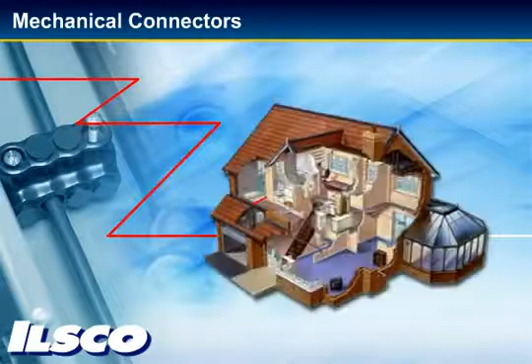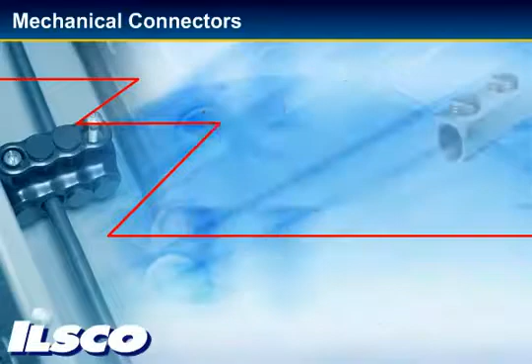Trace a wire run through any residential, commercial, or industrial job site, and you will discover one of the most critical electrical components in the business, the humble connector. Wherever you find wire, you'll find electrical connectors. And as far as power connections go, the mechanical connector is one of the most efficient methods of splicing, terminating, or tapping electrical wire.

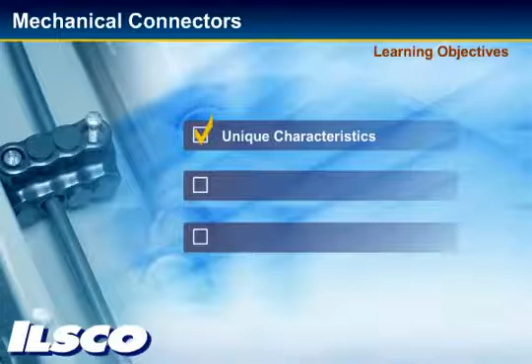In this module, we will define the three primary functions of connectors. You will learn the unique characteristics of mechanical connectors and how they differ from other connector types. We will review the standards that apply to mechanical connectors, and will demonstrate important steps for the proper installation of these connectors.

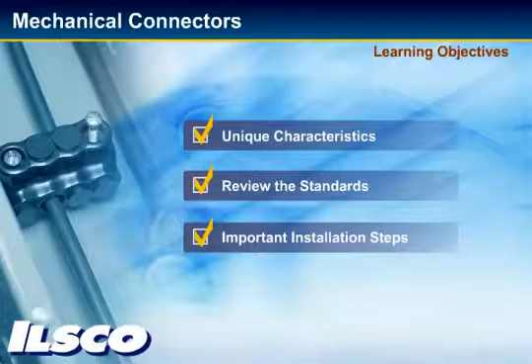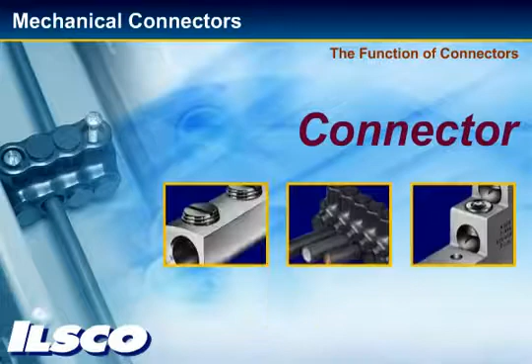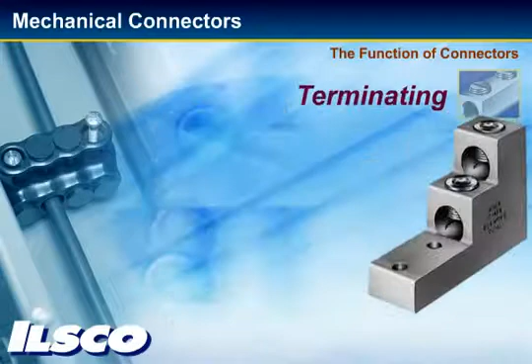The term connector is used to describe all devices used to connect electrical conductors. Connectors serve three primary functions: splicing or joining two similar or dissimilar cable ends together, terminating or preparing a wire or conductor for use with some electrical component or device, and tapping or transferring power from one circuit to form an additional circuit.

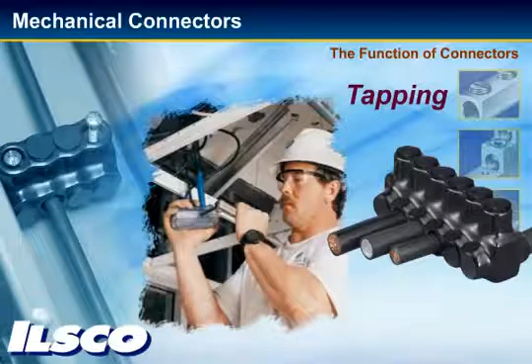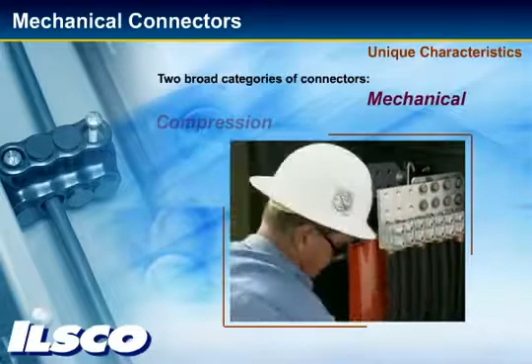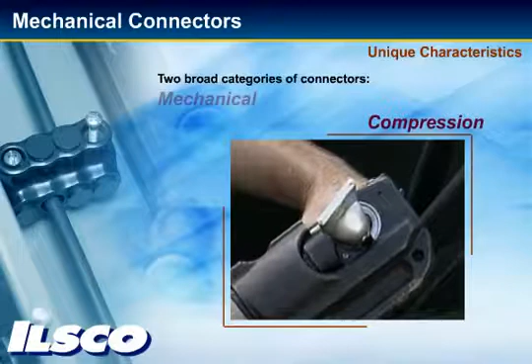There are two broad categories of connectors, mechanical and compression. Mechanical connectors are pressure-type connectors that use the pressure or torque applied to one or more tightening members to force the conductors into a reliable connection. Compression connectors use a high force, normally generated by a tool, to squeeze the connector onto the conductor.

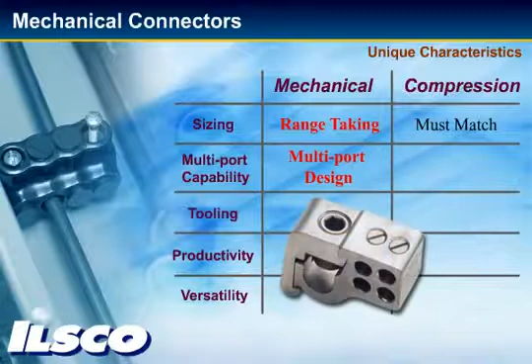Here's how the two types compare. Compression connectors often must closely match the cable size they're used on. Mechanical connectors can accommodate a wider range of conductor sizes, helping to reduce the number of connectors that must be inventoried. This feature is referred to as range taking. The multi-port design of some mechanical connectors allows a single connector to terminate many different size cables, while a different compression connector would be required for each individual cable size.

Mechanical connectors require no dies to inventory, so less hardware is required. Compression connectors require specific tools and dies, which must be available on the job site.

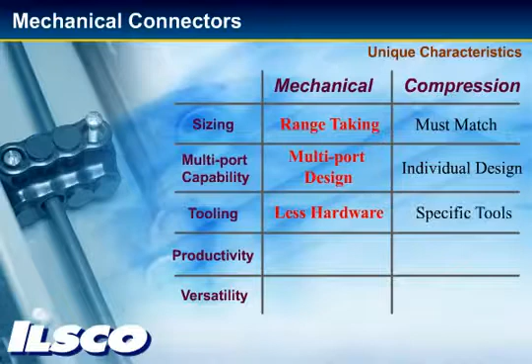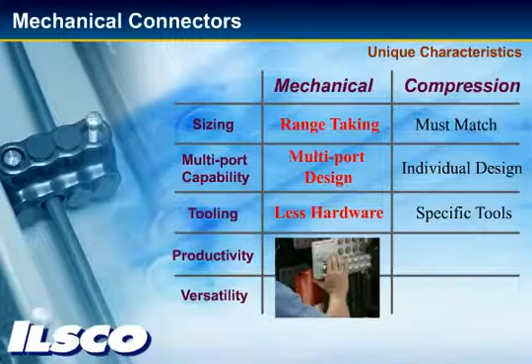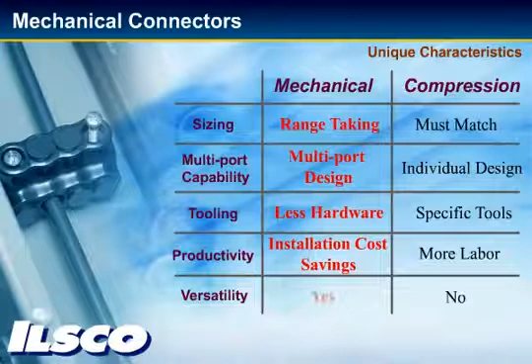Installing mechanical connectors is less labor-intensive than compression. There are fewer parts, which equates to less time on the job, resulting in installation cost savings, an important consideration for contractors. Unlike compression connectors, mechanical connectors are reversible and reusable.

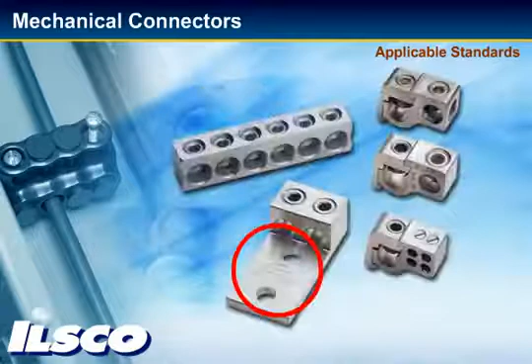ILSCO tests their connectors to ensure they perform to applicable UL, ANSI, and CSA standards. One of the most important considerations is that copper connectors should only be used with copper conductors. Aluminum connectors can generally be used with both aluminum or copper conductors. The marking on the connector will show if the connector is dual rated for use with either aluminum or copper conductors. This will be a mark of AL9CU or AL7CU. The marking on the connector should always be considered before use.

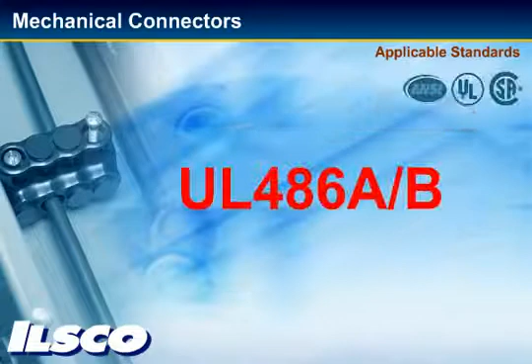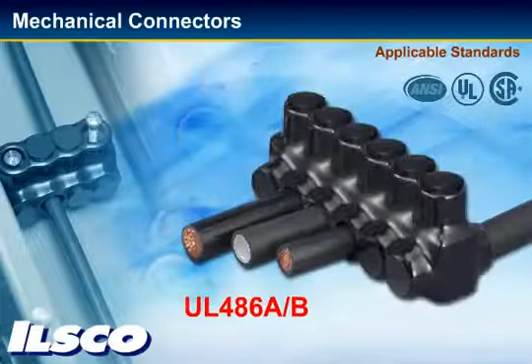Let's review a few of these common standards applicable to mechanical connectors. The UL 486A/B power standard applies to connectors used with copper or aluminum conductors. It is intended to ensure that connectors will make a reliable connection when used with certain size solid and stranded conductors specified in the standard.

All standard connectors are tested at 90 or 75 degrees centigrade. Copper connectors are assumed to meet the 90-degree test standard and are not required to be marked as such. UL requires that aluminum connectors carry a temperature rating mark. Connectors may carry one of the following rating marks.

These ANSI standards, ANSI is the American National Standards Institute, are similar to UL 486A/B standards, but are applicable to the utility industry. Be aware that there are other standards that apply to various types of connectors. For more information on these, we provided links to detailed UL information.

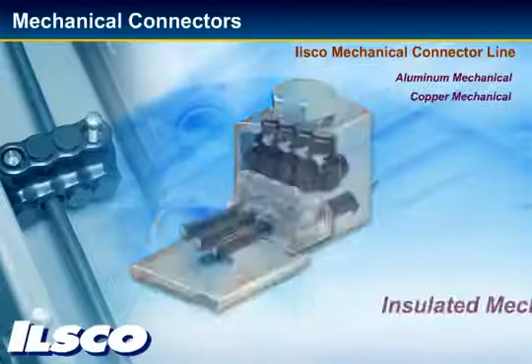The ILSCO mechanical connector line includes these product families: aluminum mechanical, copper mechanical, insulated mechanical, insulation piercing connectors, tap connectors, splicers reducers, and aluminum neutral ground bars.

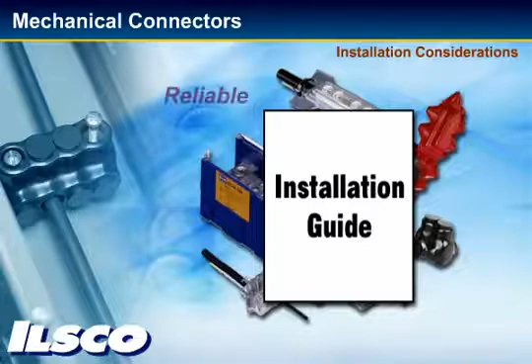As with all electrical components, following recommended installation guidelines will assure safe, long-term, reliable connections. Begin by selecting the proper size connector. Determine the proper size connector using the ILSCO catalog and the conductor size ranges described there.

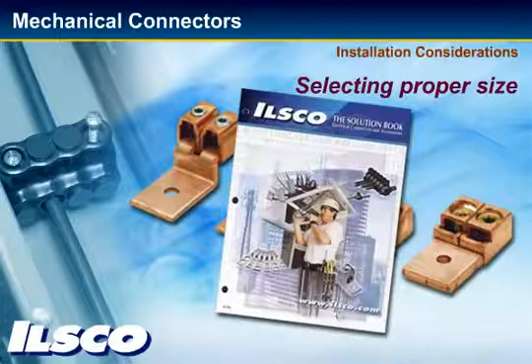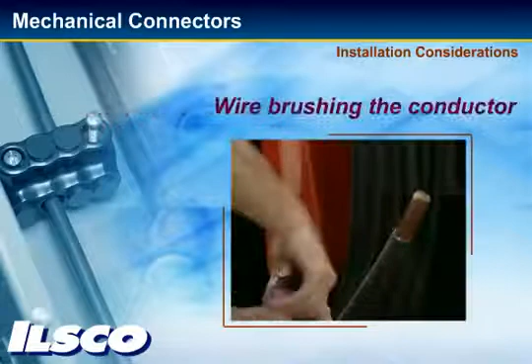Next, strip the conductor's insulation according to proper installation instructions. Using a wire brush, clean any oxide from the connector and conductor. Before inserting the wire into the connector, a deoxide compound should be applied to either the connector or the conductor. ILSCO Deox limits the exposure to air between the conductor and connector, inhibiting future oxidization. Deox may be used from -30 degrees to 300 degrees Fahrenheit and can be used on copper or aluminum conductors.

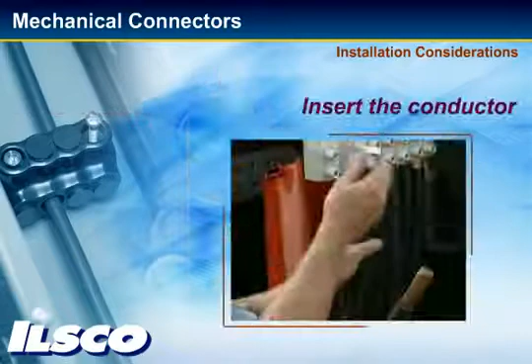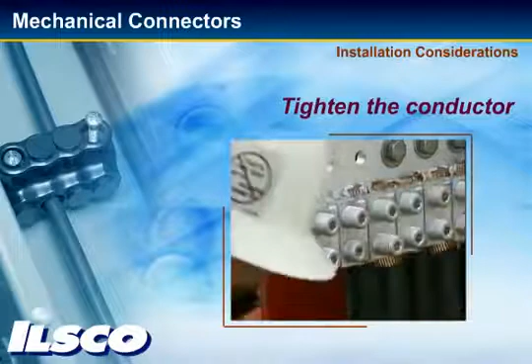Insert the wire into the connector with one conductor per opening, unless otherwise indicated. Tighten the connector to the recommended torque. Refer to the appropriate torque values chart for either mechanical or socket head screw connectors.